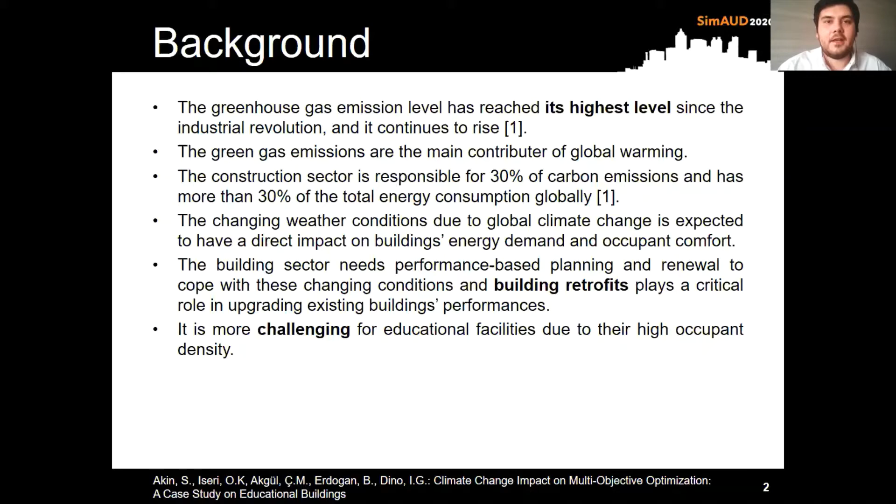When we look at the objectives of the existing buildings' performances, we can see that there's a trade-off between these objectives. For example, if you would like to increase the occupant comfort during the winter time, you can heat the building more, but it can cause an increased number of digits in your bills. So in order to find an optimal solution between these two contradicting objectives, optimization processes are seen as the key solutions.

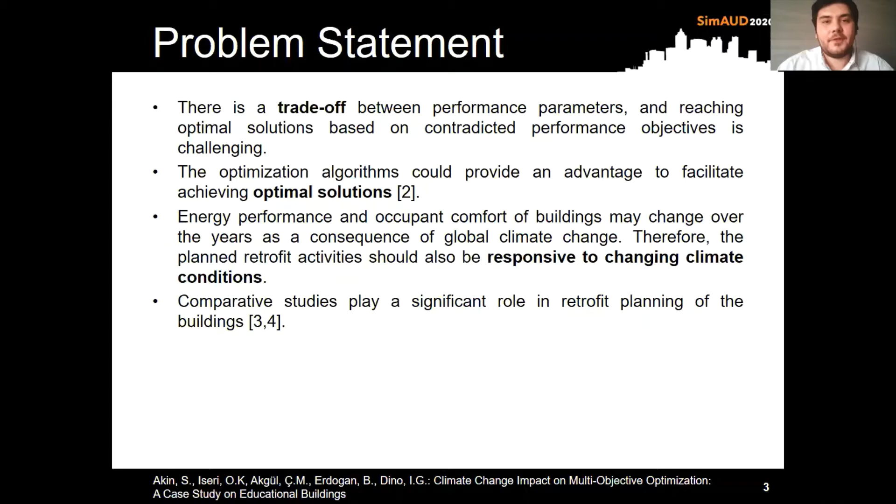However, these renovation activities should be planned not only for our current weather conditions, but they should also be evaluated by considering the prospective weather conditions too, because our building is going to survive for future years too.

In the study, we would like to propose an approach focusing on the realization of a multi-objective optimization with the objectives focusing on reduction of discomfort hours and total energy demand for prospective retrofitting actions. And we also applied this methodology for different climate conditions, one for the current average weather conditions, and we also used projected prospective weather data, and we applied the same optimization process for these two different weather data.

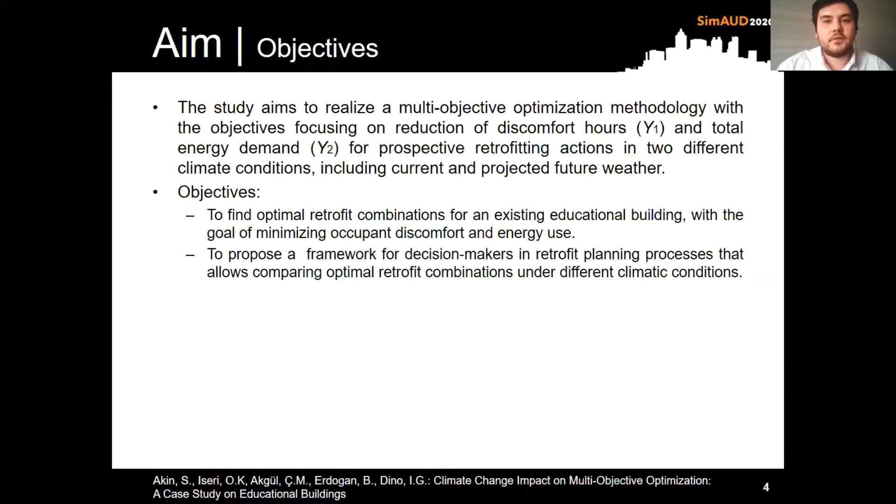So to summarize our objectives, we would like to find optimal retrofit combinations for an existing educational building with the goal of minimizing occupant discomfort and energy use. And also we would like to propose a framework for decision makers in retrofit planning processes that allows comparing optimal retrofit combinations under different climatic conditions.

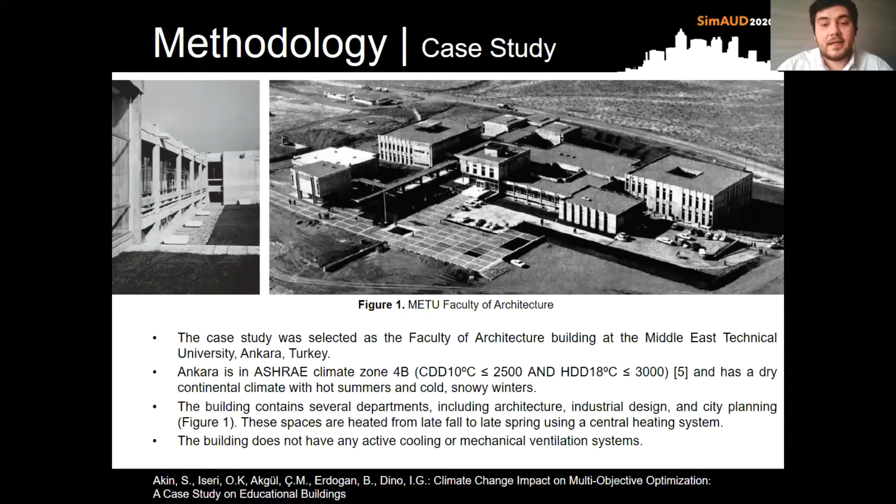The building was constructed in the 1960s. It does not have any insulation in the walls or the floors, because it was built following the modernist approach. And it does not have any active mechanical ventilation or cooling system currently. The building has several departments, including architecture, industrial design, and city planning. And these spaces are heated from late fall to late spring using a central heating system.

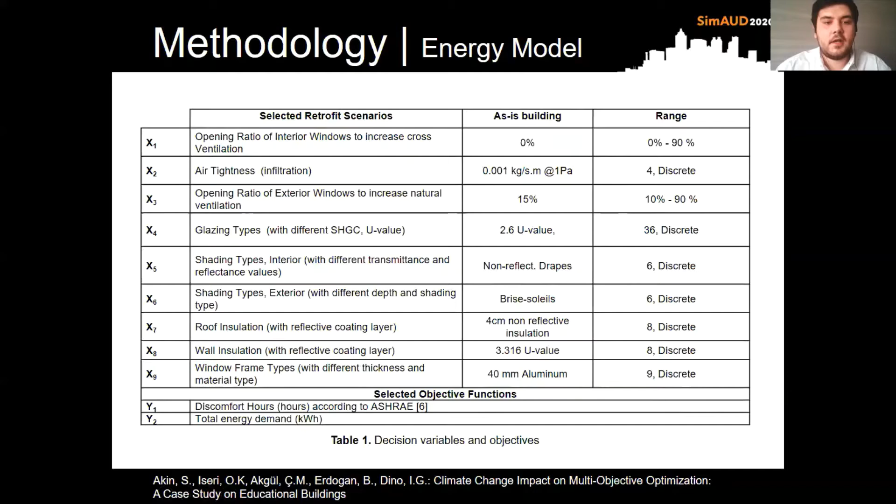And as I said before, we selected two objective functions, which are discomfort hours and total energy demand. For the building energy simulations and optimization, we use DesignBuilder software. We have two different models, a detailed one and a simplified partial model of the faculty building. We use the simplified partial model in this study in order to reduce the duration of optimization simulations. But this partial model also represents the general layout of the faculty building, with similar spaces.

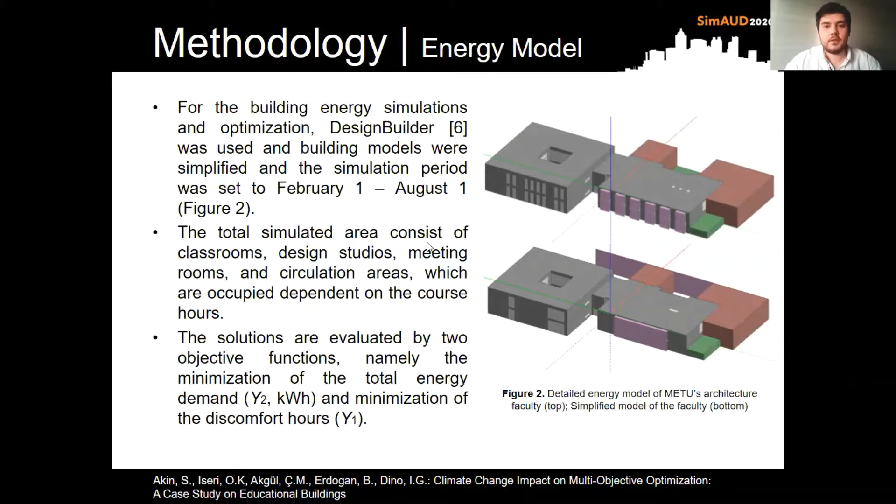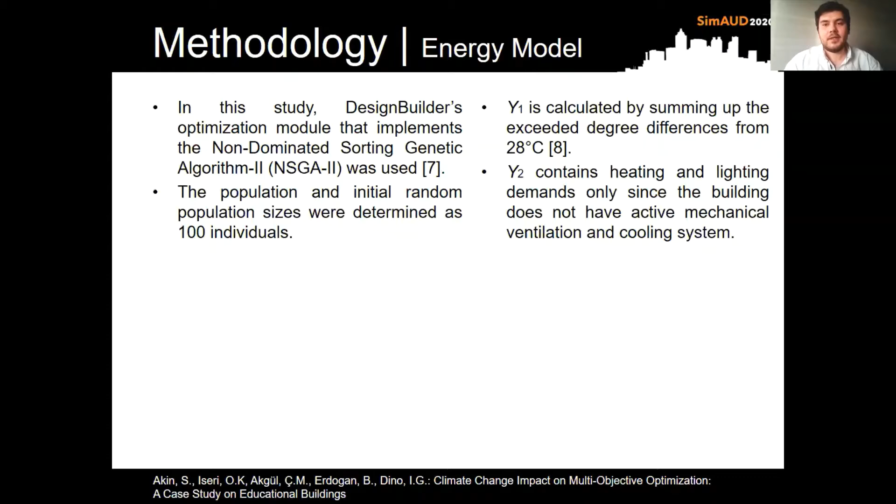We use DesignBuilder's optimization module that implements the non-dominated sorting genetic algorithm 2, in other words, NSGA-II. The population and initial random population sizes were determined as 100 individuals. Our first objective, discomfort hours, was calculated by summing up the exceeded degree differences from 28 degrees Celsius. And for our second objective, we mainly focus on the heating and lighting demands only, since the building does not have any active mechanical ventilation and cooling system.

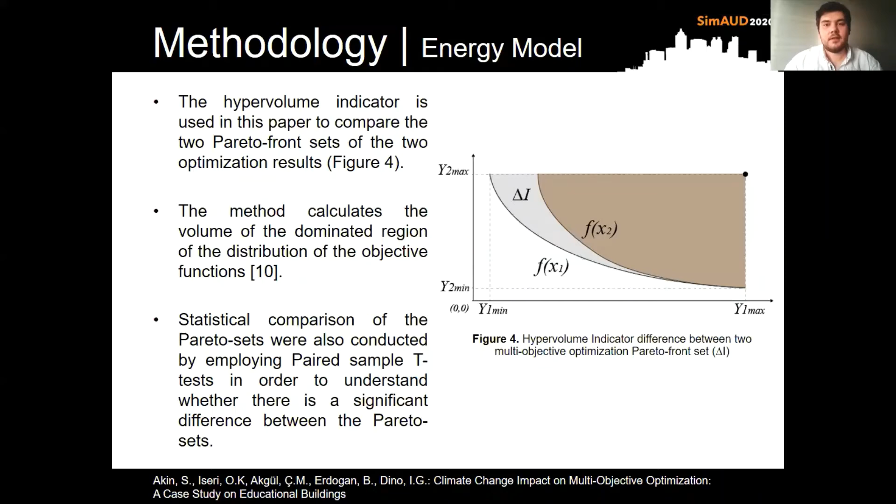So in order to understand the differences between these two optimization results, we used a hypervolume indicator, which is based on the comparison of the two Pareto sets of the two optimization results. The method calculates the volume of the dominated region of the distribution of the objective functions. Apart from the hypervolume indicator, we used a statistical comparison of the Pareto sets in order to understand whether there is a statistically meaningful difference between these two Pareto sets.

So as results, you can see in figure 5 the optimization process with the current weather data has resulted like this. There were thousands of simulations combining all of those retrofit scenarios. And the second one was the projected data optimization results. By switching back and forth between these two optimization results, you can see the differences between them.

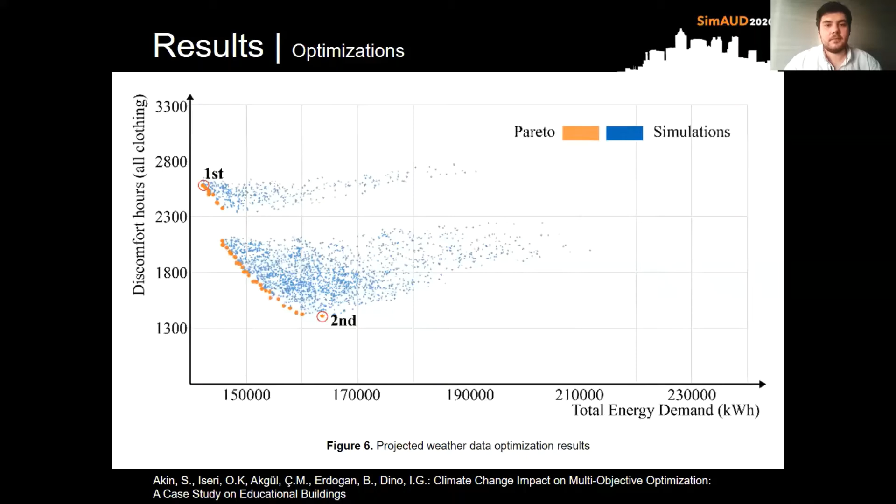For the current weather conditions, 49 optimum results were produced. Discomfort hours varied, for the current weather data, between 1,005 and 2,321, and the total energy demand varied between 37 and 47 kilowatt hours per meter square. Discomfort hours are actually quite high compared to any reference building because our building was built in the 1960s and it does not have any kind of insulation in the walls or the floors.

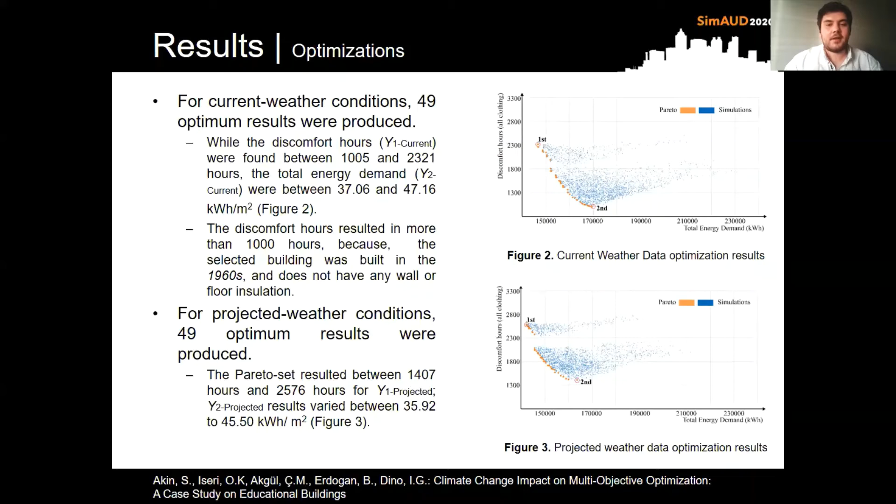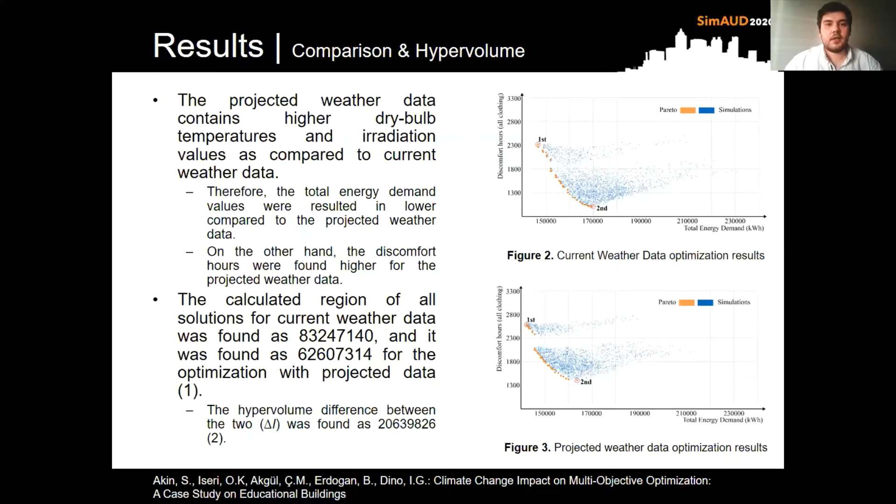For the projected weather data, the Pareto set resulted between 1,407 hours and 2,576 hours. And for the second objective, the results varied between 35 and 45. So from the results, it can be understood that the projected weather data contains higher dry bulb temperatures and irradiation values as compared to the current weather data. So the total energy demand values were lower for the projected weather data. And also discomfort hours were found higher because of that reason. And we also conducted the hypervolume indicator for the comparison of these two Pareto sets.

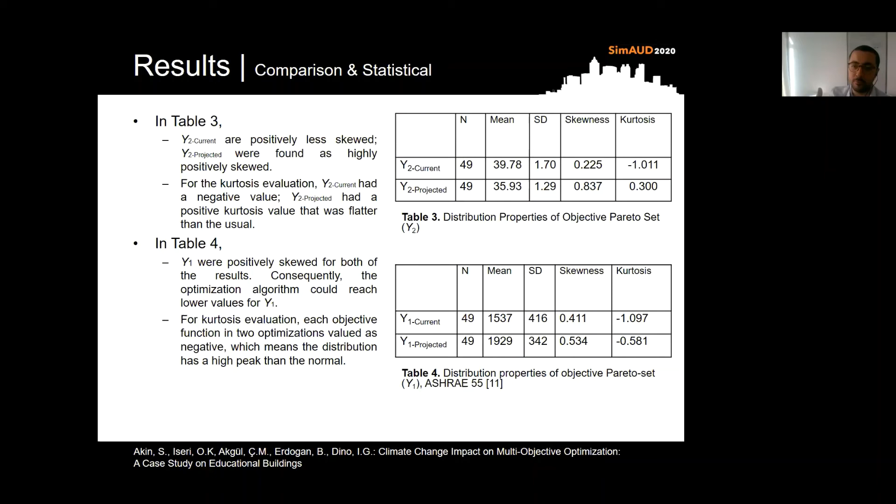Hello everyone. In these results, we wanted to compare two Pareto solutions based on statistical approaches, and you can see in table 3 and table 4, for two different objectives, the mean values are different from each other. And by checking the skewness and kurtosis values, we can see that for the energy demand results, the outputs are differentiated from each other. But for the discomfort hours, they are a bit closer to each other by distribution properties. But the mean value difference is higher than for the energy demand, you can say.

In addition, we applied a t-test function for each Pareto solution's objective function. In table 4, you can see the t-test comparison for the discomfort hours; we can see that there's a significant difference of average values between the two Pareto sets by checking the T49 values. In addition, we can say that the current weather data optimization results were 538 discomfort hours lower than the projected one, which is directly related to the higher outside temperatures.

In table 5, you can see the comparison of the two different energy demand results, and we can say that they are strongly correlated to each other by checking the correlation parameters. It's very high, and it's similar for the discomfort hours also. But in the end, by checking T49 values, there's a significant difference in their value distribution, but the distribution trend is similar.

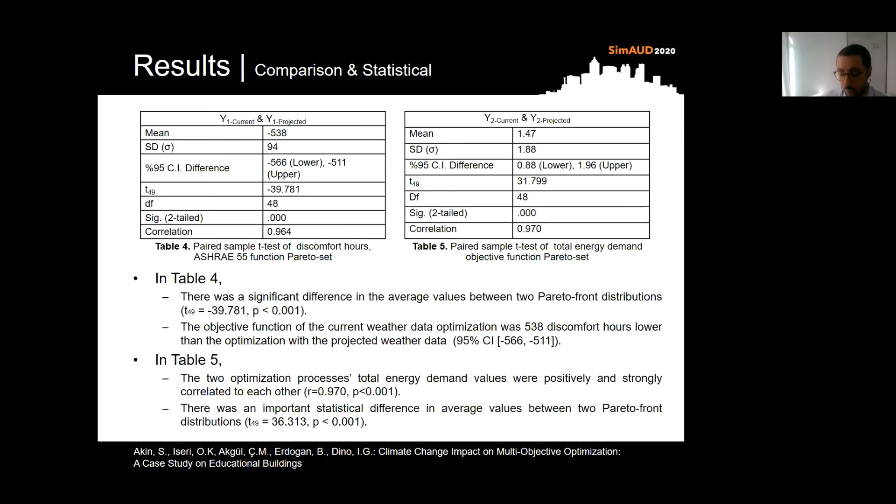In conclusion, we have tried to achieve a framework for decision makers under different climatic conditions, and by checking table 4 and table 5, you can see that it is achieved. In addition, we were looking at the efficiency of retrofit planning in the longer term. And as you can see, for the future conditions, the results are changing, the distributions are changing. That means when executing a retrofit planning process, it needs to consider the future weather conditions.

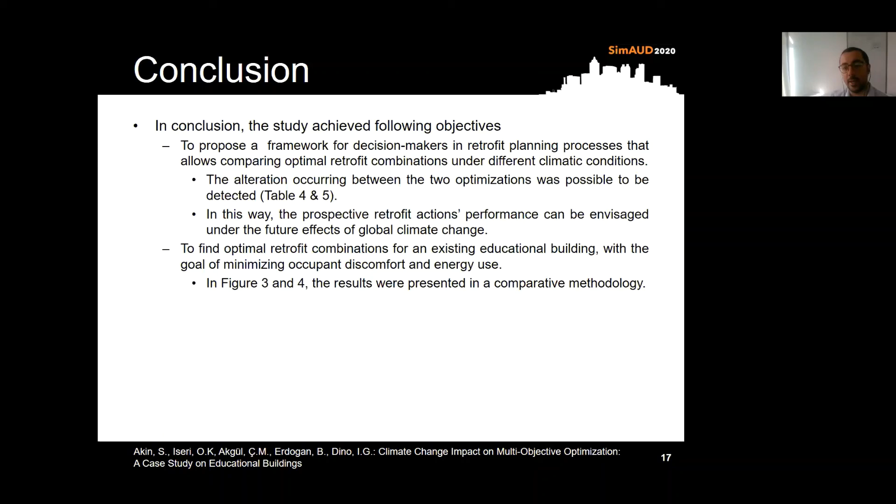And last of all, we wanted to obtain optimal results for each climate condition. And by checking figure 3 and figure 4, you can see that we achieved those results.